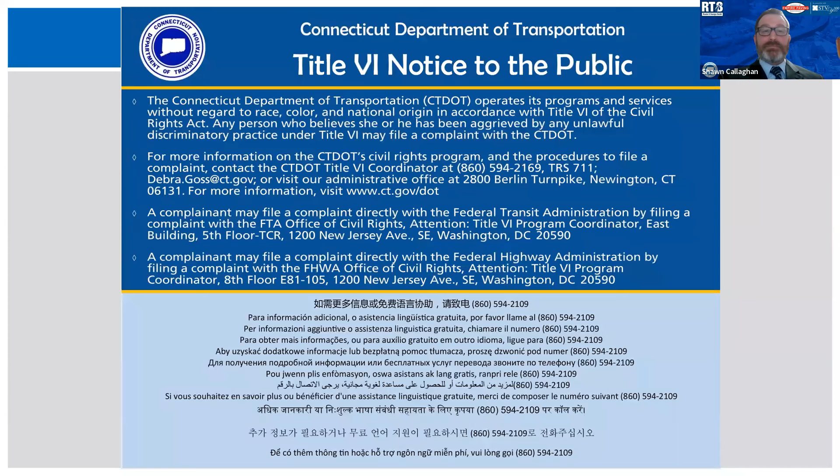If you are one of the participants who is audio only, on the phone, you may dial *9 to raise and lower your hand.

The email is info@route8designbuild.com, with the 8 being the number 8. You may also call and leave a voicemail at 860-594-2020. You may also visit the project webpage at www.route8designbuild.com, again with the number 8. Please note we will have a comment period open through January 27th, 2023. However, the Zoom Q&A is only available during this public meeting.

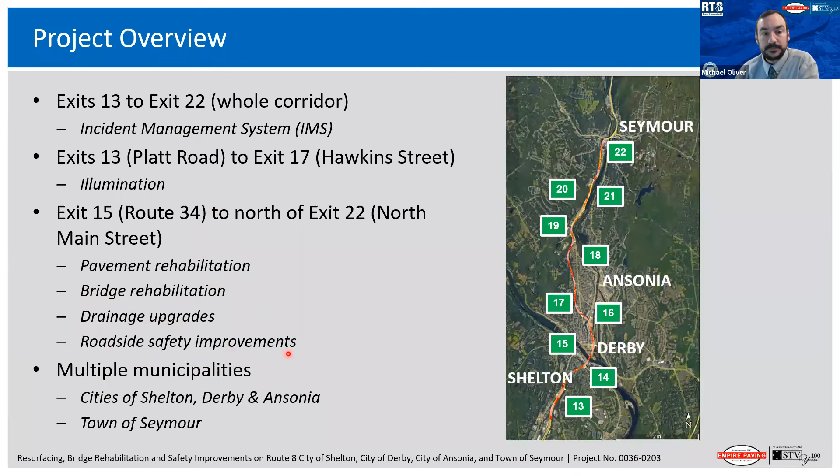Talking a little bit more about illumination and IMS: again, the illumination and IMS run through the full corridor. The illumination work is predominantly in Shelton and Derby. We're going to be upgrading to all LED light fixtures and new light standards and foundations. The light standard is the pole itself with the arm, or cross arm, and the foundation is a new concrete foundation. It's going to include all new underground conduit and conductor, the wires.

Included in the illumination scope is also some new underbridge illumination and illumination on some existing bridge structures, such as the Commodore Hull Bridge.

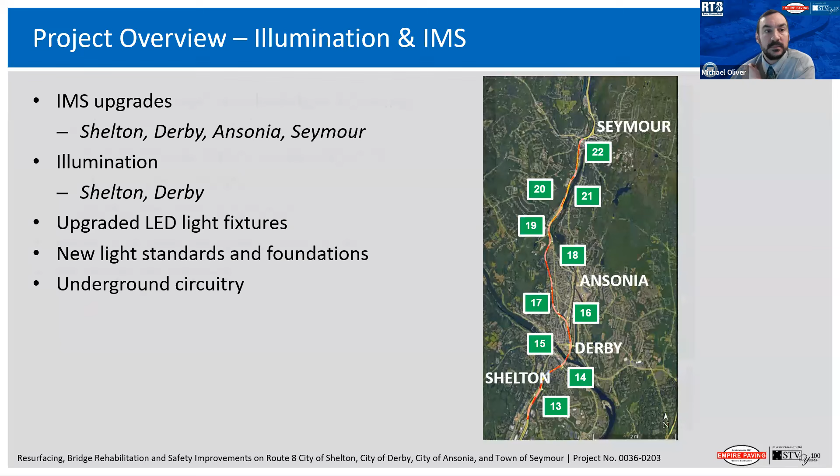Digging into the pavement rehabilitation, this is one of the largest scope items on this project. The pavement rehabilitation extends approximately 6.5 miles on Route 8 northbound and southbound, from exit 15 up through exit 22 at North Main Street. It's going to cover the towns of Derby, Ansonia, and Seymour. The crux of the pavement rehabilitation is going to begin with concrete base pavement repairs.

First we're going to mill down the existing bituminous surface to the existing concrete wearing surface. In overnight lane closures, the concrete base is going to be surveyed and repaired. Following the concrete base repairs will be a brand new bituminous overlay, similar to what's out there today, but with a very long service life - a 30-year service life. It's a unique piece of this project, providing a very long service life pavement.

Some of the early work items our team has undertaken was a series of pavement cores, and you may have seen us out there earlier this year in the fall. Obtaining pavement cores helps us get a better understanding of the existing depths, thicknesses, and location of the existing concrete base slab.

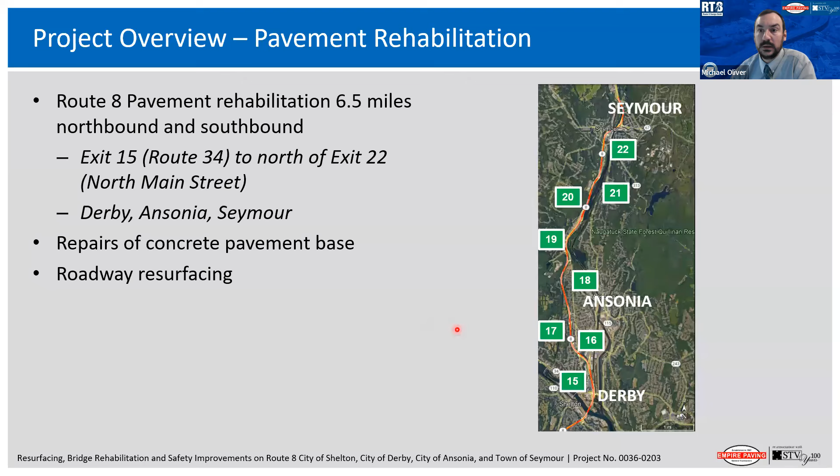I'd like to now move on to some of the roadside safety improvements. The roadside safety improvements follow the same project limits as the paving limits, starting at exit 15, Route 34, heading north up to North Main Street. These improvements are predominantly guide rail upgrades, and we're bringing them up to current federal standards - MASH compliant standards. MASH stands for Manual of Assessing Safety Hardware, a testing procedure implemented by Federal Highway.

We're going to be replacing a lot of the existing metal guide rail and 3-cable rail that's out there with this new guide rail system. The guide rail is predominantly in the shoulders and median in some parts of the project, but predominantly there is an existing concrete median barrier curb. The existing median barrier curb is a 32-inch high Jersey barrier shape type that was installed back in the 80s.

Cars and trucks nowadays are bigger and taller, so our new median barrier that's going to be installed will be 42 inches in height, with a new single slope design - brand new standards and details that were just released by Connecticut Department of Transportation. This Route 8 corridor is going to look and feel like a brand new highway when we're done with it, and we're very excited about that.

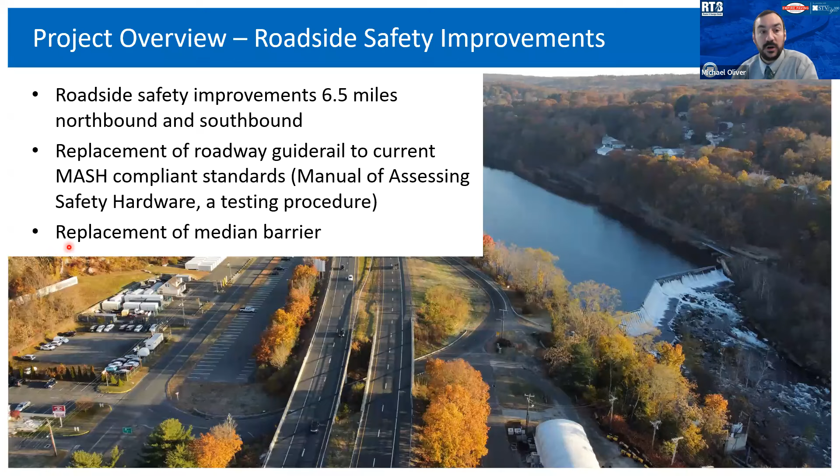Talking a little bit more about some of the design elements of the project: the drainage upgrades. The drainage upgrades also follow the pavement rehabilitation limits, exit 15 to exit 22, up to North Main Street.

The existing drainage system was installed back in the 50s, and it's certainly beyond its useful service life. A lot of the existing structures and pipes are metal pipes that have corroded. So to get our full understanding of the existing drainage system condition, our team is undertaking a very extensive drainage investigation.

Site investigation and cleaning operation that's actually beginning this coming Monday. We're going to be working diligently to clean and collect data from our existing system so it can be used in the final design.

Our proposed rehabilitation effort is going to be pipelining a lot of these existing pipes, unless they're determined to not be lineable, and then we're going to consider full replacement.

There's also a series of under drains, which are smaller pipes that run parallel to the roadway. These under drains were originally 6-inch metal pipes, and we're going to be replacing them with brand new pipes. So there's going to be some relatively significant trenching happening on the roadside to replace these drains.

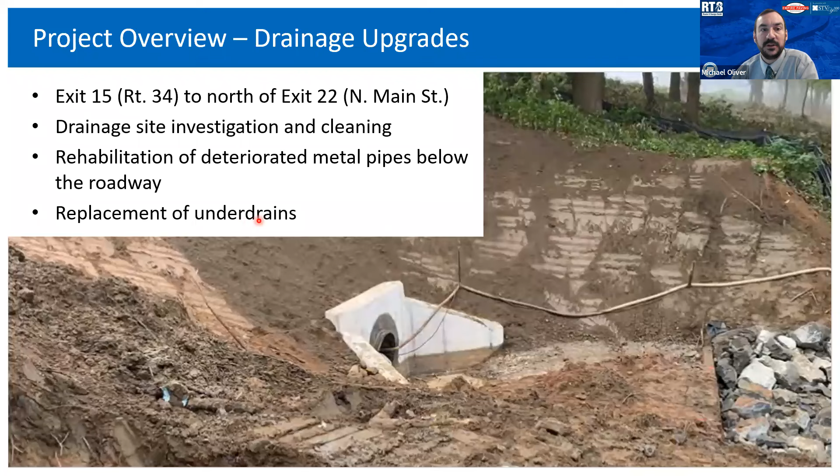Moving on down to the bridges. There are 11 bridges through the project limits, and similar to the pavement and drainage limits, the bridges are within the paving limits, starting at exit 15 and heading north to North Main Street. The bridges do have varying scope of rehabilitation.

There are 4 bridges, some of the larger structures within the project limits, that are going to be receiving deck patching and new membrane waterproofing, and all of the bridges will receive a new overlay.

There is some minor bridge work happening on Bridge 588, on the underside of the structure, such as some hollow concrete removal—minor deteriorated concrete removal, predominantly in the region where there are roads underneath the bridge. It's quite minor, and it's limited to Bridge 588, which is that long bridge in Seymour.

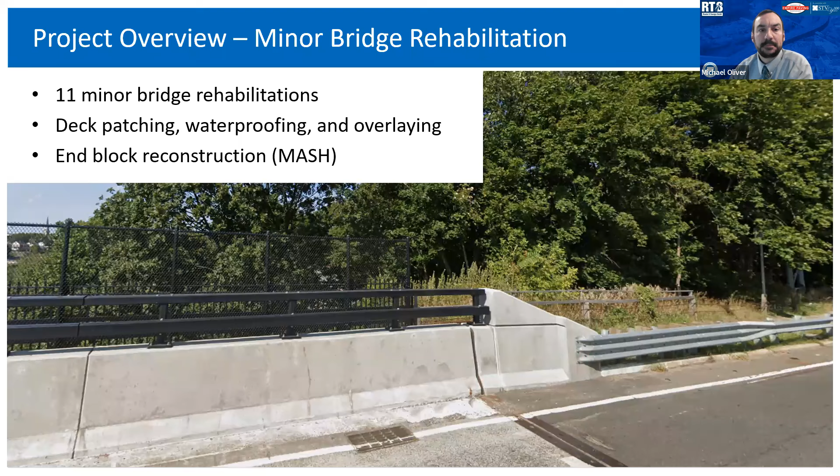That wraps up the major scope items for this project, and I'd like to now introduce you to some of the project funding. Quite a bit of the funding, 80%, is covered by the feds, and 20% is state funded. The total project cost is $77.3 million.

The project was awarded to Empire Paving through the design build procurement method, and Empire and STV are teamed up on this assignment. I'd just like to provide you folks with a little bit of insight into the design build procurement method.

Design build is part of Federal Highway's Every Day Counts initiative. The benefit to the public is that it reduces the project time by condensing the project design and construction together.

It's a partnered relationship with the contractor, Empire Paving, and STV, the designer. So currently, we're working collaboratively on the design side to squeeze that typical 3, 4, 5 year design time into really 1 year. It's a very intense process that we're currently going through.

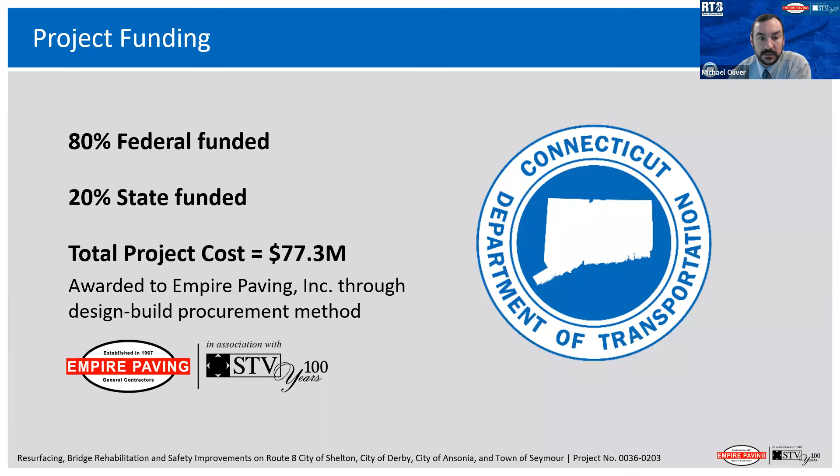It's anticipated that we will receive release for construction. This little window between final design and construction is going to be later in the spring, and Empire Paving is planning to mobilize and start heavy construction in the spring of 2023.

I just wanted to stop and reiterate that some of the work happening this winter in the field is just going to be that significant undertaking with the drainage site investigations, which is going to be cleaning and camera inspection of the drainage system.

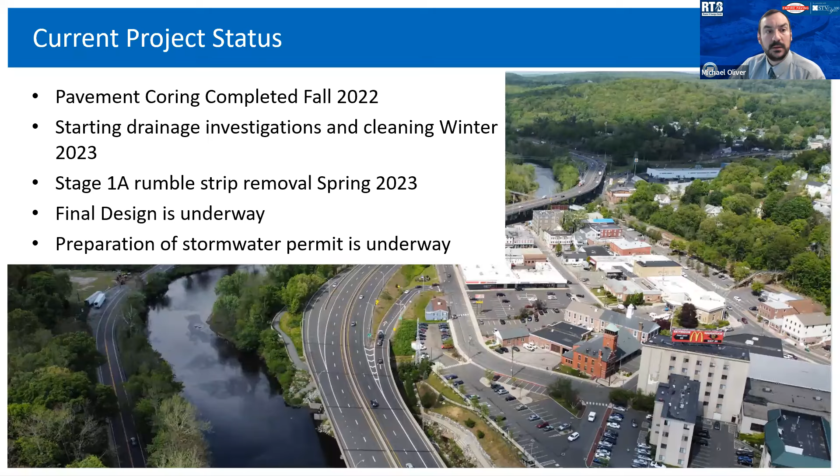A little bit about general construction activities. Initially, the work is going to be completed by taking lanes during off-peak hours, so you'll see some daytime and some nighttime work. We're certainly going to be minding our limitations of operation, so we're not going to be impacting traffic or taking lanes during the morning rush hour or the evening commute.

Predominantly, this work is going to happen at night, with some daytime activities. Daytime activities will be work that's behind protection, like work happening behind concrete barrier curb or temporary barrier curb.

We do have a few ramp closures planned with detours, but they're only short durations and will only be at nighttime. That's to facilitate some of the work happening on our numerous ramps throughout the project, such as paving and guide rail installations — it's the safest approach for our crews. The team is developing these ramp detours, and they'll be coordinated with each municipality through a detour agreement. Detours will be presented in the press release and posted on our project website two weeks in advance.

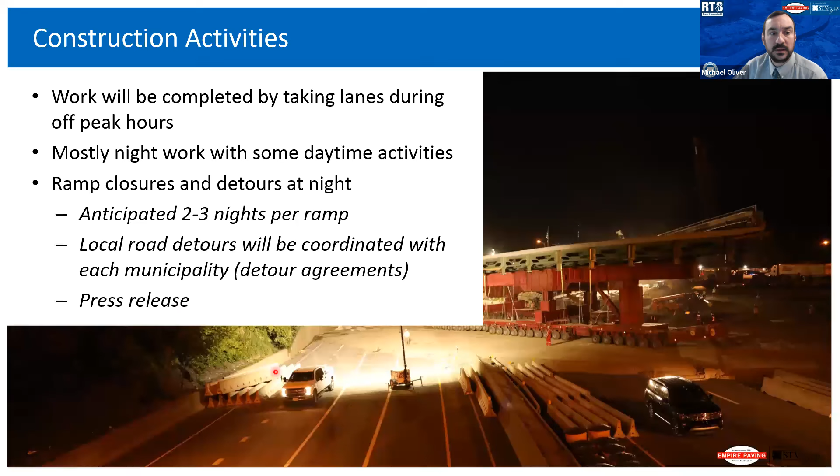To expand a bit on our construction staging and phasing, we took this drone image from a very similar project, Route 2 up in Hartford, which really demonstrates how traffic is going to be shifted around. You can see in both situations here that the shoulders had been paved or rehabilitated, and traffic had been shifted onto the shoulders. This is similar to the work we're talking about doing by milling the rumble strip and pushing traffic over to facilitate the work zone for the median barrier reconstruction.

You're going to see traffic patterns just like this starting as early as the springtime. The traffic heading south here has been pushed over to facilitate that shoulder reconstruction.

Predominantly, the project is going to be undertaken in 3 major stages: starting with the shoulder rehabilitation, then transitioning to the median barrier reconstruction, and finally, once the median barrier has been replaced, mainline pavement reconstruction. Traffic will be shifted, the median barrier replaced, and once the median barrier is good, the patterns will be opened back up, and we're going to mill and pave the roadway.

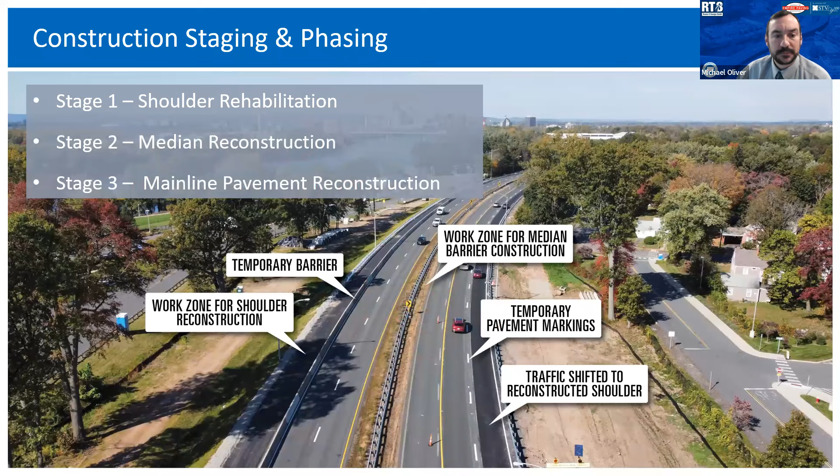So a little bit more about the construction staging and phasing. Since the project is so long, especially the paving limits being about 6.5 miles, the contractor is planning to progress the work from south to north.

The center median reconstruction is going to occur in 1 mile increments. As 1 mile of median is reconstructed, we're going to move the traffic patterns up, and the concrete base repairs are certainly going to happen once the center median work has progressed 3 miles ahead. So it's an incremental approach that the contractor is proposing.

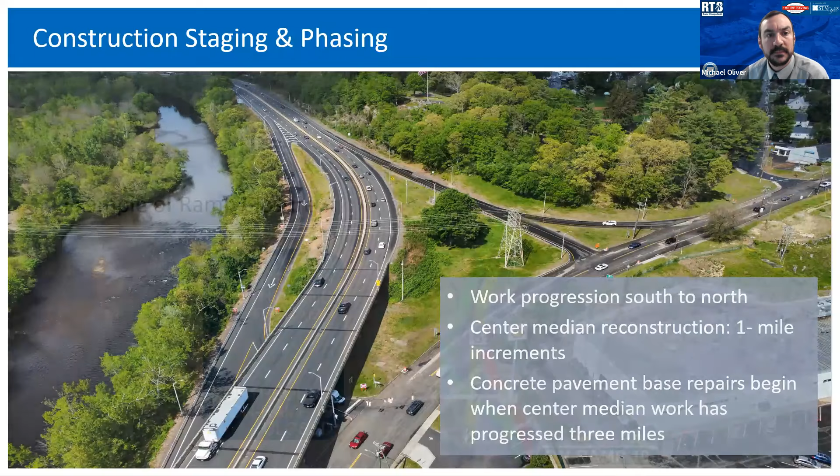So a little bit more about our typical ramp closures. This is a quick graphic here, but for all intents and purposes, ramp 19 is closed. Traffic is going to progress north on Route 8 and get off at the next exit. It would swing around and hop on what would be the detour road, which we're hoping is a state road. If not, we will get a detour agreement with the municipalities.

So again, most detours will be set up for state roads, and detours will be coordinated with local municipalities. In general, traffic will be detoured to the next exit, and travelers will follow signage back to the closed exit. So again, looping around, hopping off, and coming back.

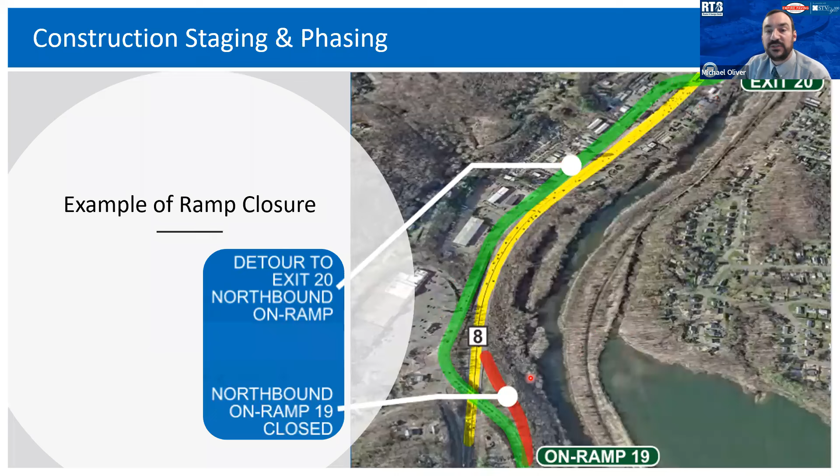At this time, I'd like to hand it back to Sean to talk a little bit more about our public engagement process throughout the project.

Thanks, Mike. So public engagement outreach is crucial and integral to this project. We started it right at the beginning of the project, and we'll continue through the life of it, reaching out to folks in many manners. So what we've already developed is a public information and communications plan, which is really the roadmap for our outreach program. That's a dynamic living document that we update as the project progresses.

We've already begun some elected and local officials outreach. We've done some town hall meetings, and we'll continue to do that. We have some stakeholder notifications in our network that we've established for the project. We are and will continue to do civic and community meetings. This is one of the meetings that we have on the docket.

And then for construction, we will be integrating timely construction notices to keep everyone abreast of when there will be any sort of traffic interruptions and where the work will be occurring.

So next steps, you can always know what's going on and check in on the project on our website, route8designbuild.com. This recording will be posted on the website, as we did mention. And then again, we will have that 2-week comment period. So if you don't feel like you want to share with the group today, or you have a thought after the meeting, please feel free to reach out and send us a comment. We'll have that open until January 27th.